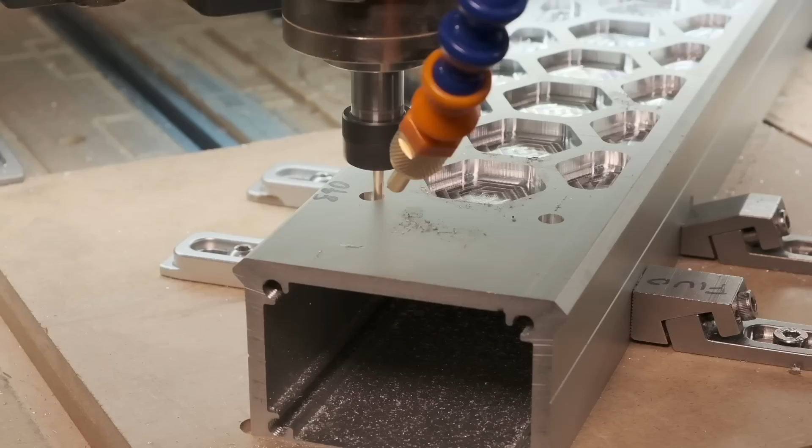In my last CNC video, I worked on the gantry rail for my custom Shapeoko. I needed to machine some features like mounting holes to add hard stops and a homing switch, but really I was just looking for an excuse to give the X-axis a lightweight aerospacey look with an eye-catching hexagon pattern.

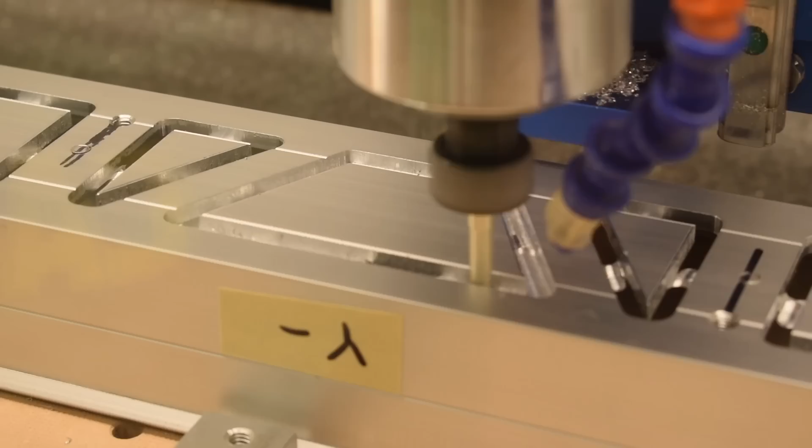In conjunction with the salvaged Y-axis rails of another previously modified Shapeoko, the approximate form factor of my CNC was locked in. The Frankenoko would be an XL-style machine about twice as wide as it was deep, but the foundational structure of the machine was still an open question.

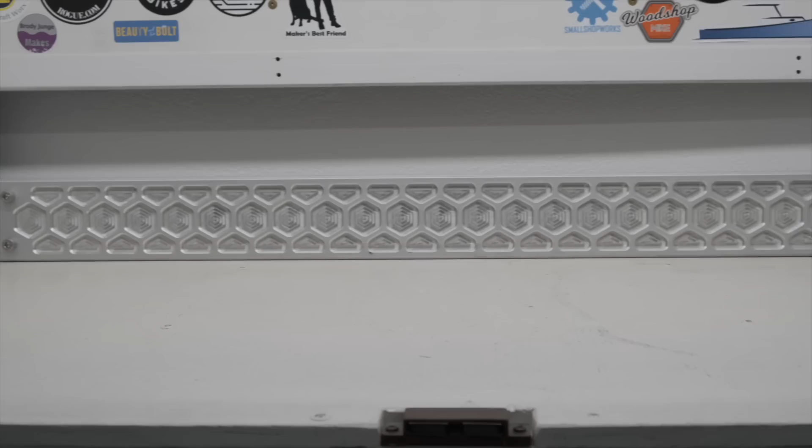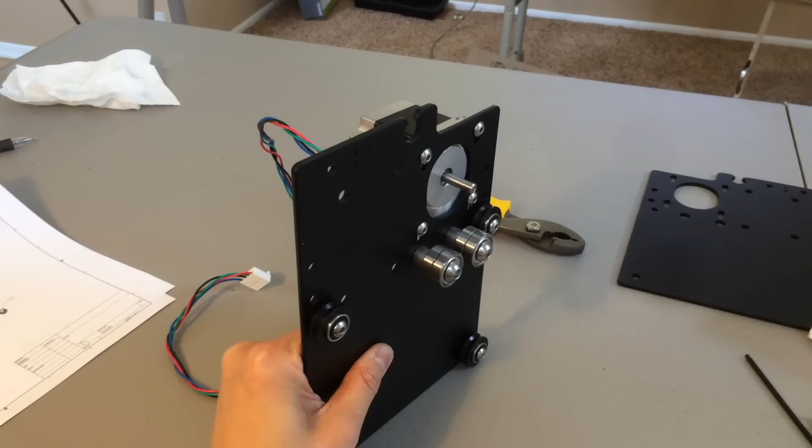I knew for sure I wanted to ditch the sheet metal style frame from the Shapeoko 3. That sheet metal design was innovative for its time because it was easily scalable for production requiring no machining, perfect for a scrappy CNC startup, but it didn't scale well in the dimensional sense. The wider the machine got, the more flex there was in the frame.

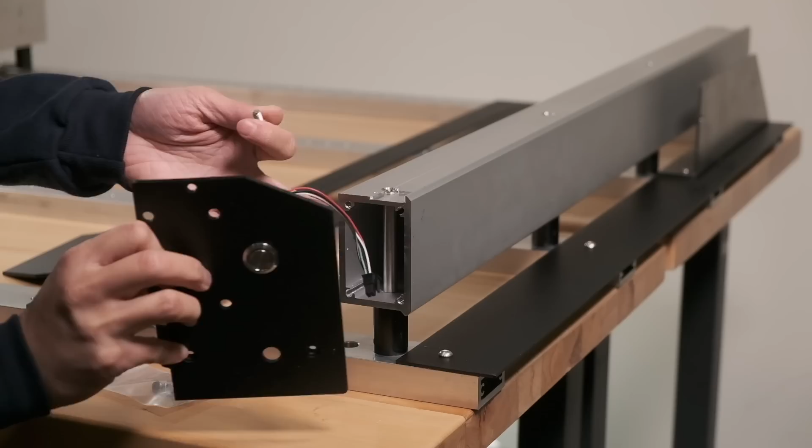When it came time for a new generation of machines, the Shapeoko 4 and Pro had Y-axis rails that were rigidly attached to a series of hybrid table base tubes, and had what were essentially cosmetic plates capping off the Y-axis extrusions. This design was much stronger and resistant to bowing across the width of the machine because these tubes have a closed cross-section and thick walls.

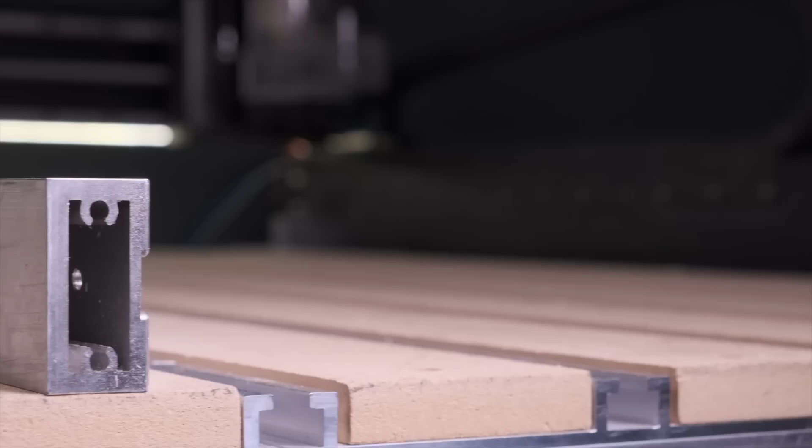Even though they're aluminum, they're still way stronger than the steel straps on the Shapeoko 3. By the way, internally at Carbide 3D, we call these extrusions Nomad tubes, because they were first used on the frames of the Nomad 883. So that's how I'll be referring to this profile from here on out.

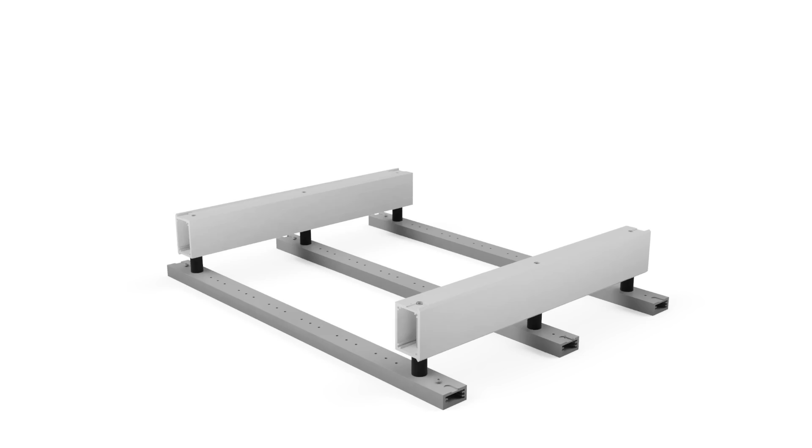This Shapeoko generation was a quantum leap forward in terms of providing a structurally sound foundation for the machine. However, this strength came at a cost. The way the Y-axis rails were attached to the hybrid table required extra standoffs and custom hardware, and it also necessitated accurately machining holes through the Y-axis extrusions, which I didn't want to take on.

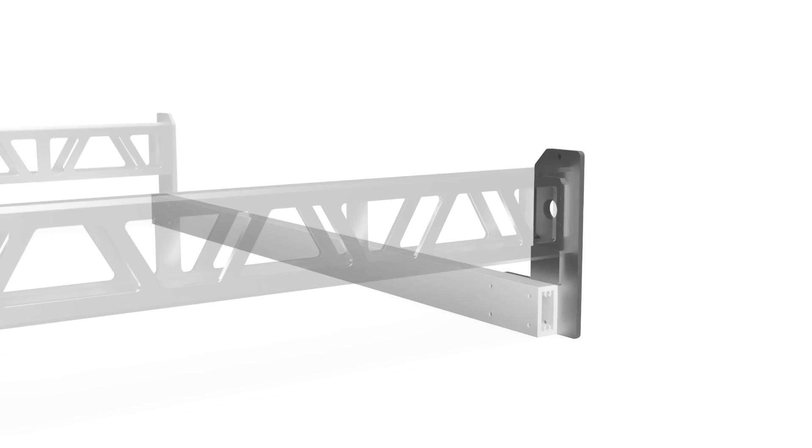So I ended up mashing together elements of both the Shapeoko 3 and 4. I would connect the Y-axis rails to a pair of Nomad tubes by using steel brackets bolted onto the ends of the Shapeoko extrusions. Originally, I had over-engineered these connecting brackets as machined parts with a ledge that would create a repeatable separation between the perpendicular extrusions and ensure that the Y-axis rails were equidistant from the bed.

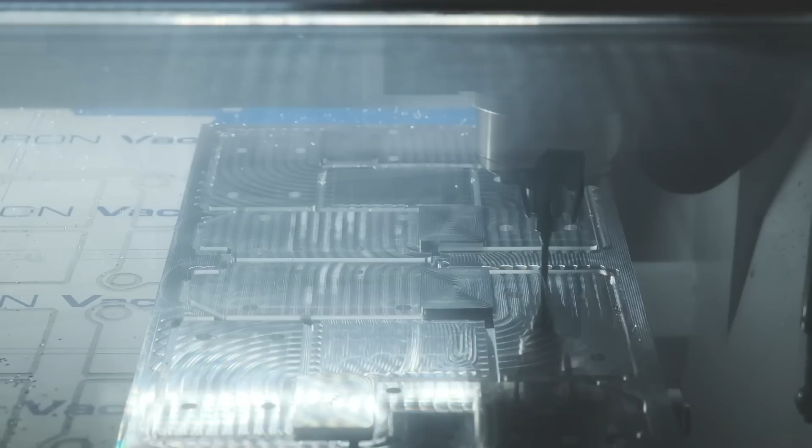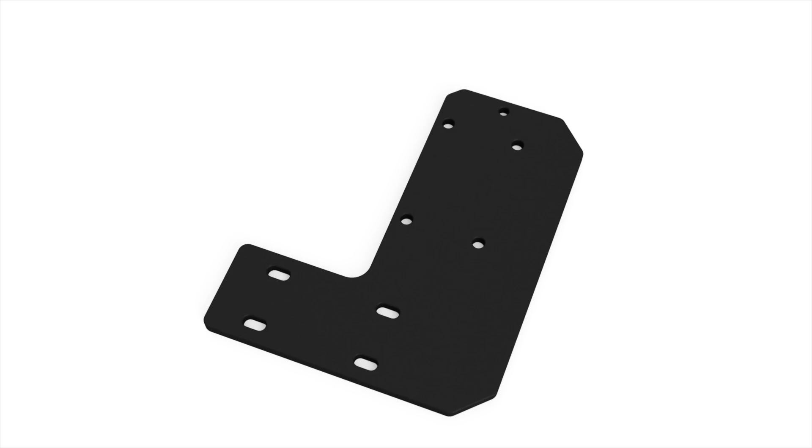But after prototyping a set of these and fighting the aluminum plate stock which wanted to curl and pop off the vacuum table of the Datron as I removed material, I realized this was the wrong approach. Simpler was better. Using laser-cut steel plates would be more in line with the historical ethos of the Shapeoko being an affordable, mass-produced workhorse CNC router.

It would allow the left and right brackets to be identical, and I could outsource these parts easily. To present more surface area to bolt things together, I would rotate the Nomad tube so the taller face was flat against my steel brackets. This would let me fit 2 rows of M6 holes for mounting, and it also put the tubes in a stronger orientation to resist sagging.

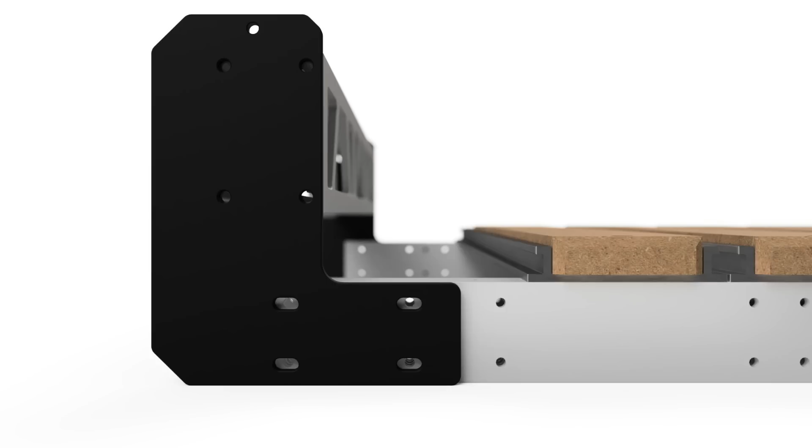Slotting the holes in my steel brackets would afford me some margin for error in assembly since I didn't know how accurately I could machine the M6 holes in my Nomad tubes.

Upon my Frankenoko frame, I had originally planned to implement a hybrid table. I planned to steal some hybrid table extrusions and work them into my base structure. And of course, I also wanted to make some improvements to the Carbide standard implementation.

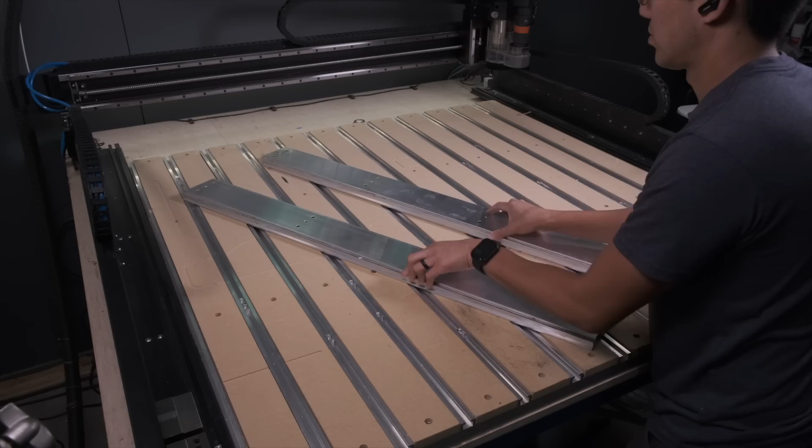I designed custom MDF slats to go with the hybrid table that had a recessed tail, so you could machine level the work area without leaving a raised lip that would prevent you from loading oversized stock. I extended and chamfered the front of the MDF to stop anything like a vacuum hose from getting caught on the aluminum extrusions, and I included multiple mounting holes to attach the MDF directly to the hybrid table extrusions.

This pinned the MDF and the aluminum together, allowing them to act as a stronger composite beam to resist deflection if a heavy load was applied to a single slat. I'm not gonna lie, I was pretty happy with these improvements, and I was excited to make this machine table a reality.

But then I ended up with a salvaged Shapeoko 3 threaded table, and letting this beautiful plate of aluminum end up in the scrapyard was just too painful a prospect. As someone with a mild hoarding problem, I knew I just had to find a way to integrate this into the Frankenoko. After reverse engineering this table in Fusion 360 and bringing it into the Frankenoko project, it appeared to be a pretty good fit for my work area.

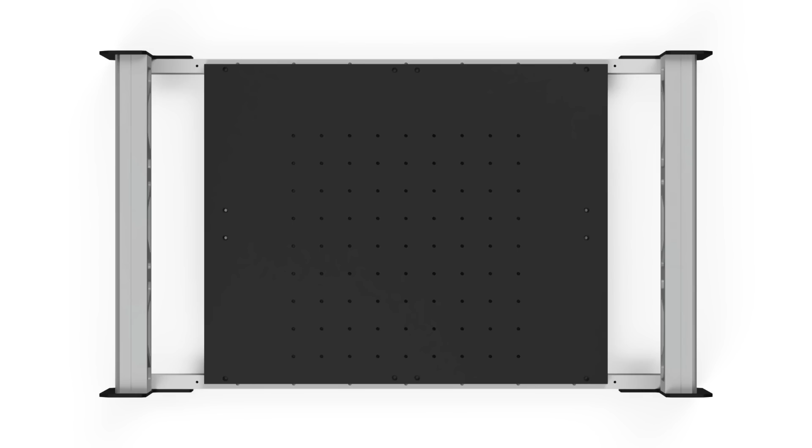The width was almost perfect for the X-axis travel of the machine, but it would still require a lot more work to pull this off. First of all, the threaded table wasn't quite deep enough to completely span the Frankenoko in the Y direction. The original Shapeoko 3 frame attachment points were meant to be on the inboard flanges of the sheet metal straps. This didn't line up well with the relatively narrow real estate I had available on top of the Nomad tubes, so I would need to mill out brand new mounting holes.

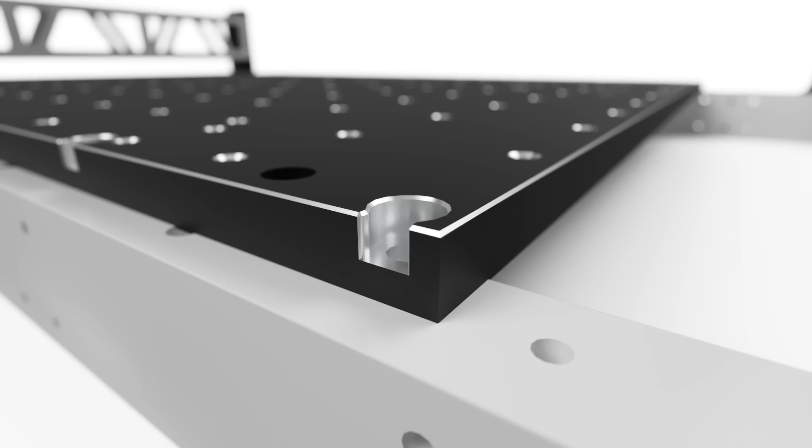The plan was to machine a new set of mounting holes sized for M6 hardware at a regular 100mm interval. Because these would live very close to the edge of the table, I would blow open the counterbores to eliminate any thin-walled sections. And if we're being honest, the original threaded table kind of skimped on holes, so I added a bunch more right up to the edges of the work area.

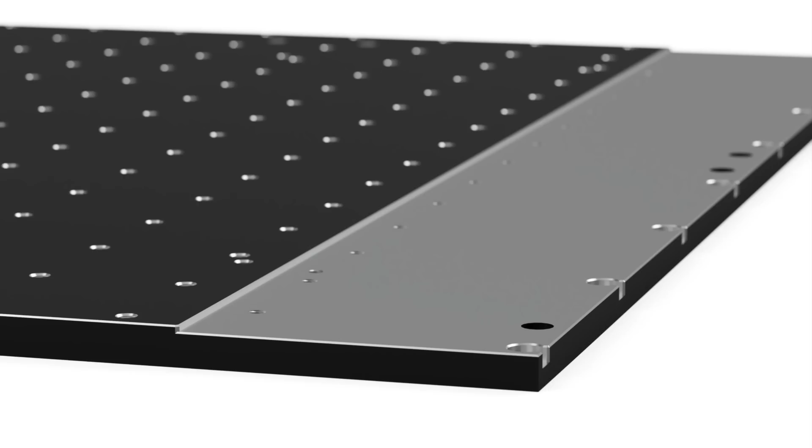Just like my original plan with the custom hybrid table MDF slats, I plan to machine down the unreachable region at the rear of the threaded table. So that was the plan. Now to make it real.

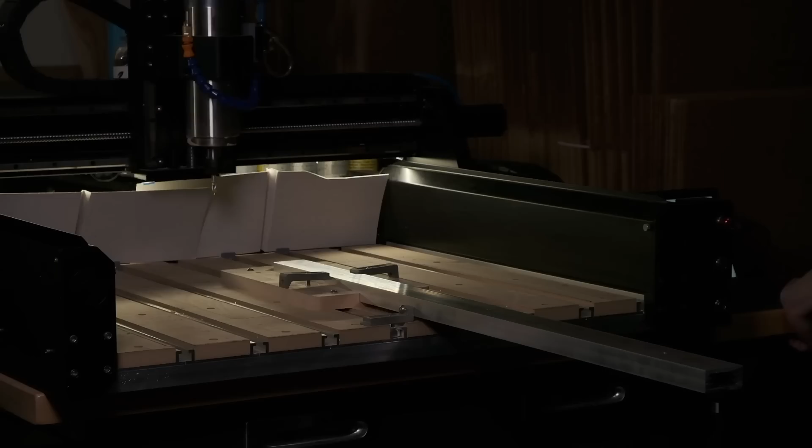I first started with machining the Nomad tubes since the stakes were much lower here. I have several spare Nomad tubes at my disposal from old decommissioned machines, but threaded tables are few and far between. I designed and machined a jig in some MDF that would hold the Nomad tubes. The point of this fixture was to allow me to use the HDM like a big CNC bandsaw, ensuring perpendicular cuts.

While I had the stock clamped down in this setup, I also machined the pre-tap M6 mounting holes. At the time, I didn't think I'd be making a bunch more M6 holes, so I didn't invest the time into working out a good thread milling recipe. These holes would just be tapped by hand.

Disclaimer alert here, this particular bit of machining was done like 2 years ago, before my well-intentioned project plans were waylaid by home ownership. This early iteration of the Nomad tubes allowed me to test fit the Frankenoko with some of my previously machined parts. I learned a couple lessons here which I would use to later improve the design. We'll cover some of those changes in a future Frankenoko video.

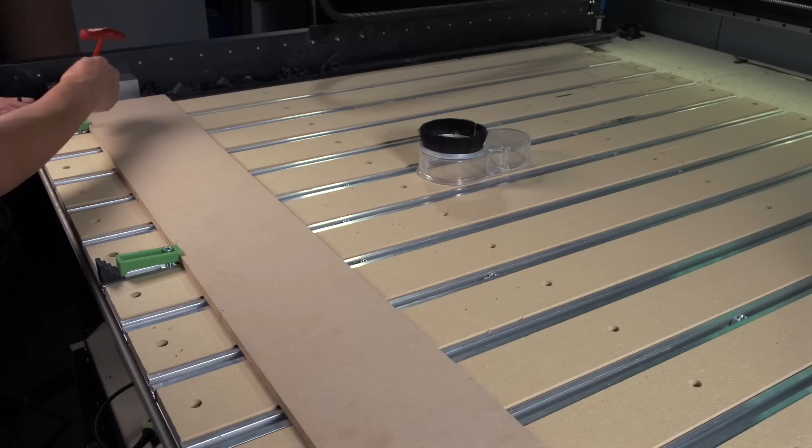Let's fast forward to the present day where it's time to perform Op 2 on the Nomad tubes on the Shapeoko 5 Pro. To ensure my Nomad tubes would be perfectly lined up with the machine axes for this phase, I cut a straight line in some scrap MDF to serve as a fence. Then, referencing that edge, I used some crush-it clamps and stops to hold a Nomad tube upright.

I bored a series of through holes that were meant to be tapped, which went off without a hitch. There are more holes than I technically need here because I'm leaving open the option of reverting back to a hybrid table if that somehow proves advantageous.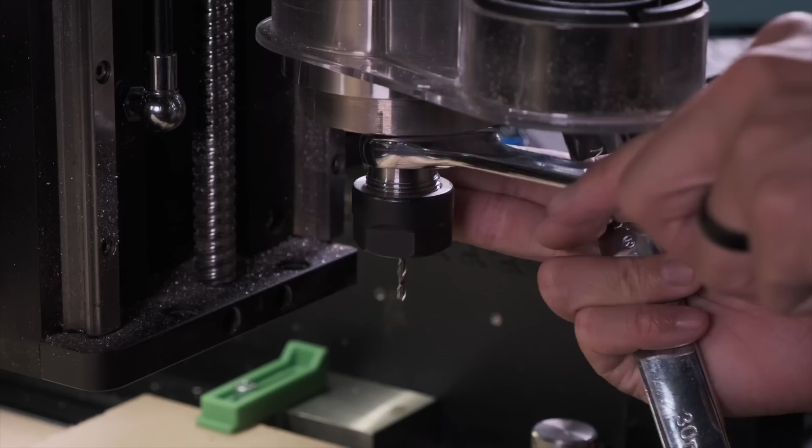Next, I took a stab at thread milling. I'm using a Datron thread mill for this step, or if you prefer the title in the brochure, the more delightfully named, though not technically accurate, thread whirler. Thread whirling generally describes a lathe process that uses an annular cutter to make precise threads quickly. By using multiple teeth positioned around the circumference of the tool, you end up with high productivity while balancing out the cutting forces and deflection, kinda like with pinch turning. But lathes are witchcraft, and we really need to get back to the world of milling.

With my thread whirler loaded in the spindle, I crossed my fingers, hit cycle start, and just watched it. No machinist stance, just hoping for the best. The moment a thread mill plunges into a hole is always the most terrifying. You're never 100% sure if the cutter's dead center on that hole when watching it from a safe distance, so you're half expecting the thread mill to crash into the material and shatter on contact.

And then, once the thread mill does engage the material, there's no going back. You can't pause and retract the cutter until it's finished spiraling its way out of the hole. If something goes wrong, you just have to ride it out. Some people might try to dial their feed rate down to like 10% and hold out hope that they could stop a catastrophe before it happens, and they might be right, but I was just kind of in the mood to YOLO it.

To my relief, first contact with the material went just fine. To take it extra easy on the tool, I opted to do the threading operation in multiple passes. After the program successfully ran its course, I tested the holes and found that my threads were binding, so I tweaked my fusion parameters until I got things to fit just right.

I know there's calculators and spreadsheets out there for this stuff, but sometimes it just feels easier to wing it. Eventually, I had satisfactory threads, perhaps a touch tight, but they would hold strong, which was the important part. I swapped out one Nomad tube for another and repeated this program a second time, and after one more cycle start, these were done.

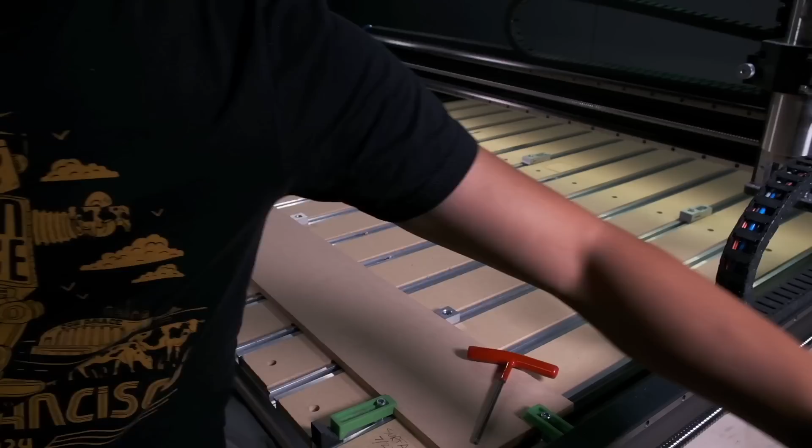Now it was time to tackle the threaded table. With a good thread milling recipe in my back pocket, I felt pretty confident going into this phase of the project, but there was still one aspect about the impending machining operations that I was a bit nervous about.

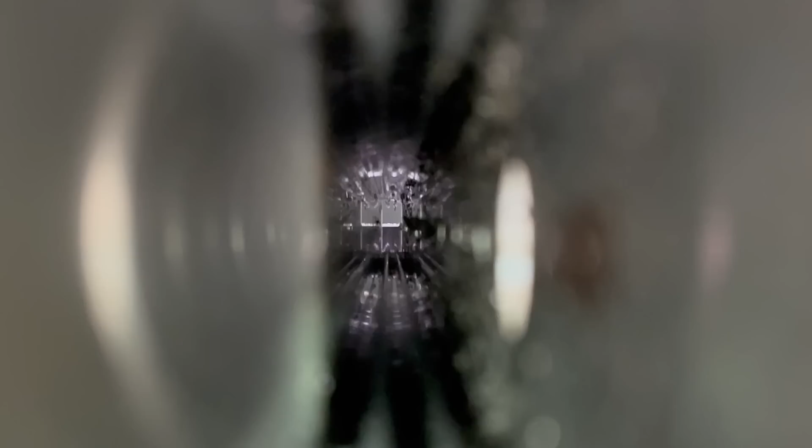Boring holes into the Nomad tubes was the easy part, because after a depth of 5mm, the end mill has already broken through to the inside of the extrusion, and all of the chips will naturally fall through. There's almost no risk of aluminum gumming up the flutes and clogging your cutter.

But this threaded table is 13mm thick, just over half an inch, or 4 times the diameter of the cutter. Chips can easily get stuck in a hole that deep. So to mitigate that risk, it was essential that I use air blast to flush the holes of any chip accumulation.

The first operation was to surface the back half of the threaded table, which I'd rotated 180 degrees for better visibility. This operation was programmed as a contour toolpath with multiple roughing stepovers. That way I could get more consistent toolpath marks versus a pocketing operation, and I didn't need to worry about how well a facing toolpath would stay within an arbitrary region.

The next sequence of operations established the counterbore areas where my table would be mounted to the frame. I increased the lead-in parameters here to guarantee that my end mill would be plunging down and starting the cut from outside of the stock.

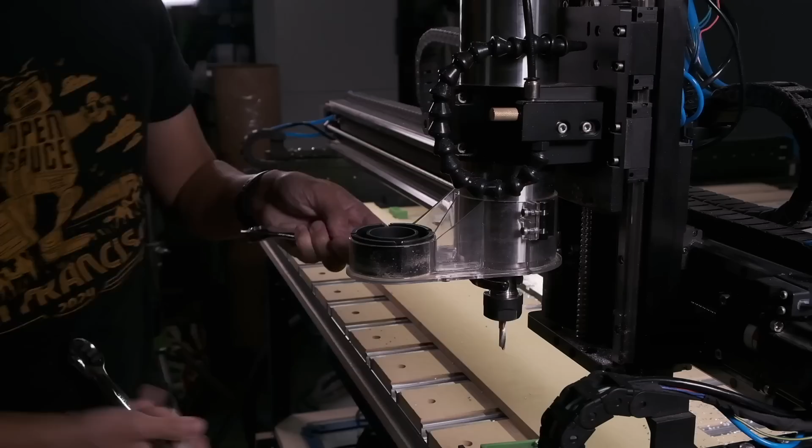Now it was time to swap in the 1/8 inch end mill to make the through holes. I took my time to make sure the air blast nozzle was centered on the end mill, aimed about 1/4 inch up the flutes. I don't really need the compressed air when the end mill first makes contact with the aluminum. I need it the most after the end mill is deeper in the material.

The initial results were good. All of the holes were successfully milled to a partial depth, then the Shapeoko came around to finish the job.

The interpolated boring I'm doing here is split into 2 phases. That gives the end mill a chance to retract halfway down, allowing the compressed air extra time and space to really evacuate the chips and minimize the risk of clogging the end mill in these deep holes.

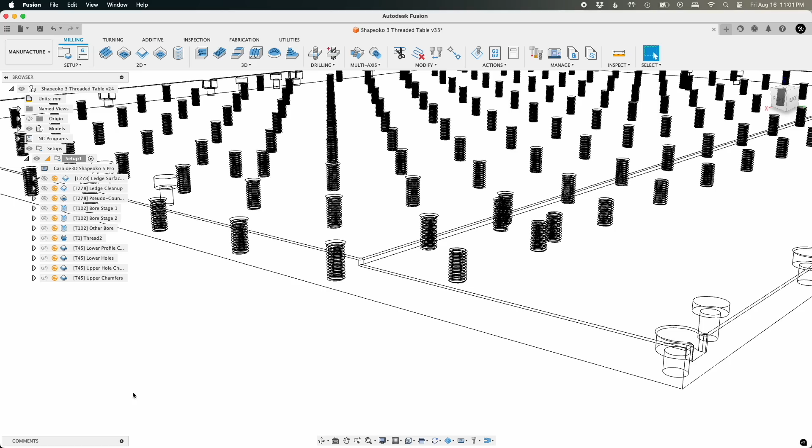These last boring operations were meant to cut through the aluminum and about 1 millimeter into the MDF. This was necessary to create the clearance for the thread mill to start as close to the bottom of the holes as possible. I didn't want to mill too deeply into the MDF though because I hate marking it up, and if the thread mill doesn't cut a full thread starting right at the bottom surface, it wouldn't be a problem because I planned on chamfering these holes manually later.

But I was getting ahead of myself. Nothing mattered if any of these 77 individual thread milling operations failed. This phase was a bit nerve-wracking, but there was literally nothing I could do.

I didn't want to chase the end mill with a vacuum hose in case I got too close to the spindle. I already had the air blast pointed at the holes and the pressure cranked up. All I could do was watch and listen for the sounds of anything going wrong. But nothing went wrong. This process went super smoothly and the thread mill lived to whirl another day.

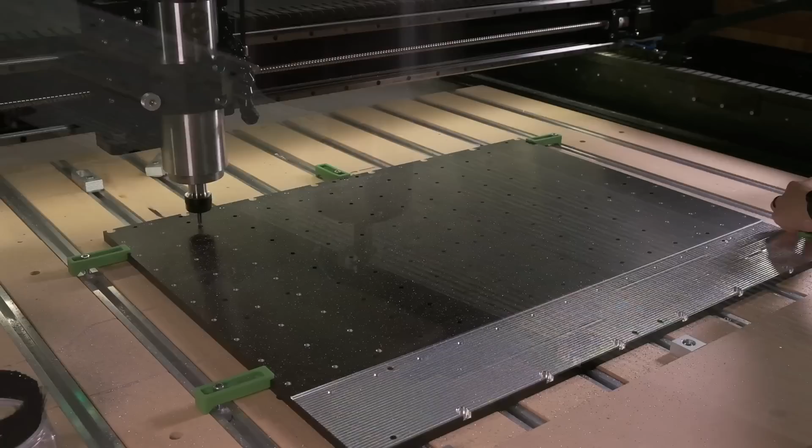And, of course, the most important part of any good project is the gratuitous application of chamfers. You'll notice some of the chamfers aren't as deep as others. I think that's because I was playing musical chairs with clamps to allow the Shapeoko to hit every side of the table, and the uneven clamping pressure created some tilting, but functionally it's not that big a deal. Other than that small cosmetic defect, I'd call this job a complete success.

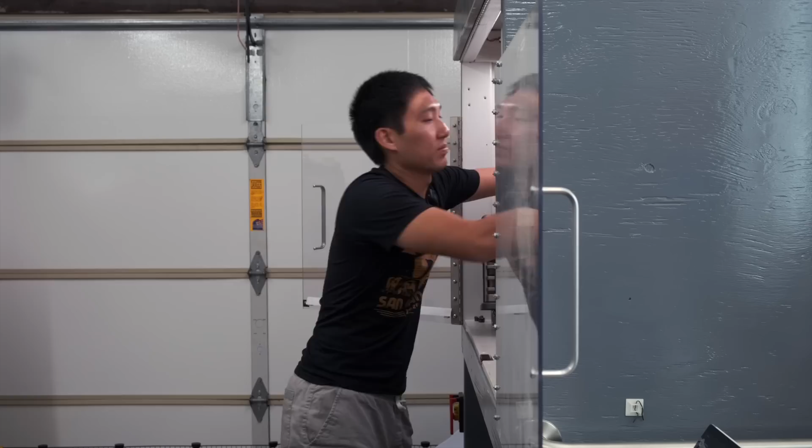When I got home, the first thing I did was clear out my CNC enclosure, which had been unceremoniously used as storage while I was waiting for my evil CNC plans to mature. Then I started laying out the parts to put together, and in addition to my extrusions, this frame would not be possible without the Y-axis end plates.

These parts were made for me by my friends over at Fabworks, who specialize in on-demand laser cutting and metal finishing services at competitive prices. These guys have helped me out in the past and I've always been satisfied with the quality of their work.

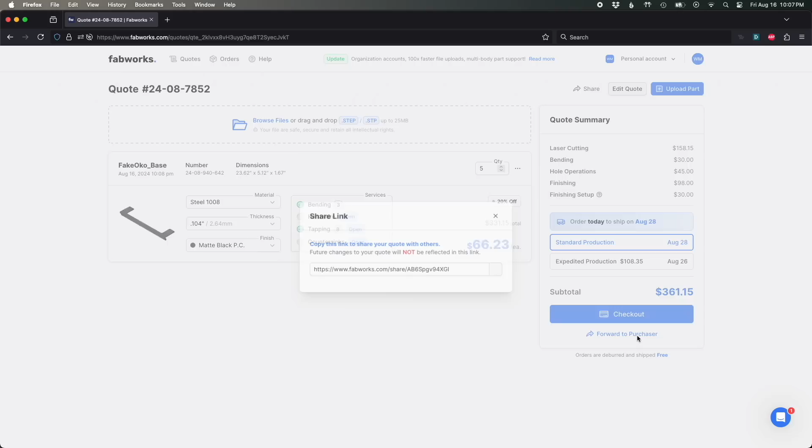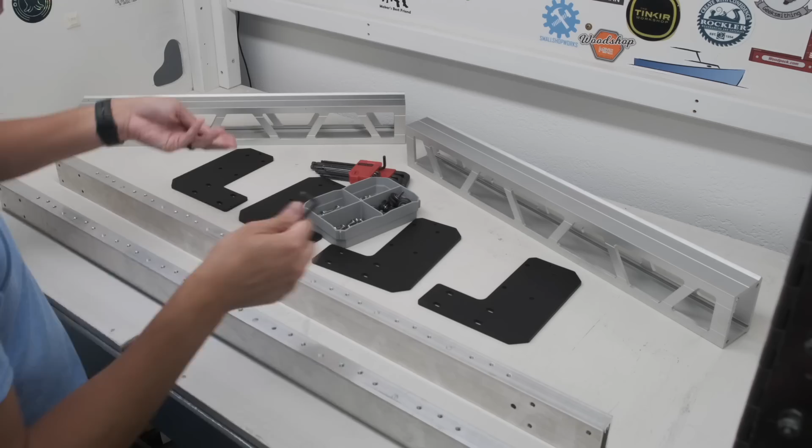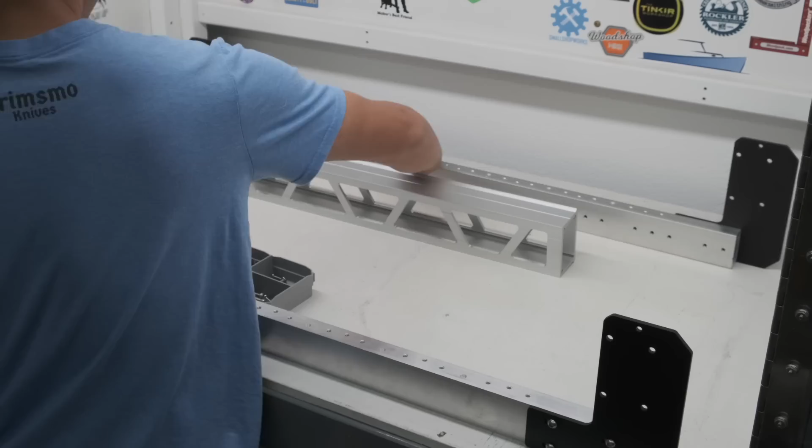Now back to the assembly. The first thing I did was attach my Y-axis end plates to the Nomad tubes. I attached the screws loosely so I wouldn't mar the powder coating. These assembled parts would stand up by themselves, so I was able to get them positioned pretty close to where I needed them, then carefully lowered in the Y-axis extrusions and pinned them with 2 screws apiece, again trying very hard not to damage the powder coating until I'm ready for final assembly.

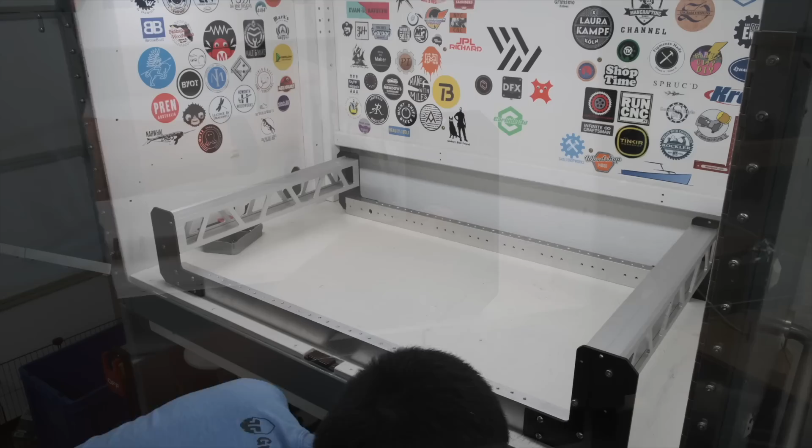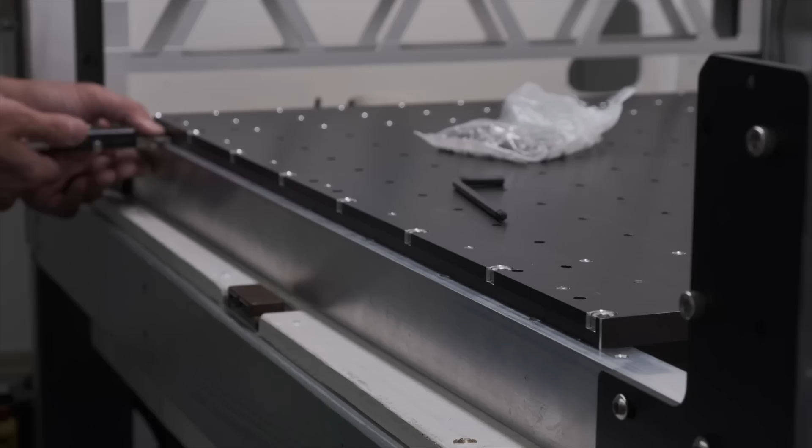Now, with the frame holding its own shape, I could drop my threaded table gingerly on top and put screws in each of the counterbore holes, tightening them to within a quarter turn of snug, backing them off where necessary. Using calipers, I bumped and tweaked the relative position of the table and the front Nomad tube so the two were parallel to within 0.02 millimeters over the width of the threaded table. I'm not German, so I'll call that good enough.

I tightened the screws along the front and confirmed the alignment was still good. Then I lightly tightened the rest of the screws on the Y-axis end plates to take out the rest of the slop in the frame. This would draw the rear Nomad tube parallel to the front tube within the tolerance of the cut ends of the Y-axis extrusions, and then I could tighten down the mounting screws at the rear of the threaded table. Then, stepping back, I could admire the magnificence of this frame.

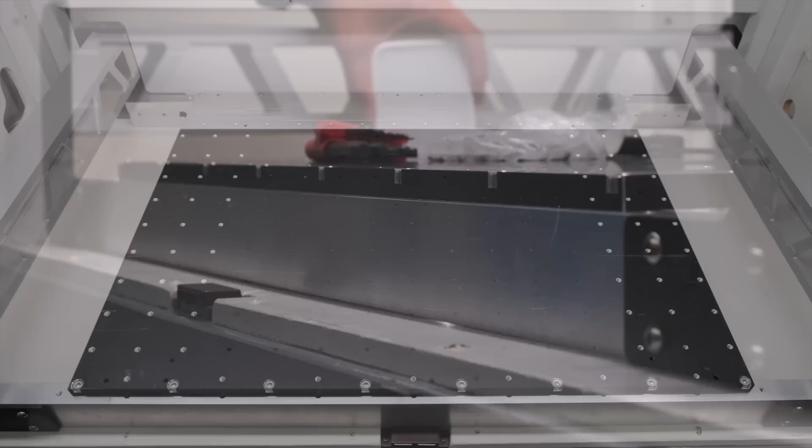The Nomad tubes rotated 90 degrees combined with a slab of aluminum absolutely do not care about any bow you have in your table or enclosure floor. They will not sag ever, at least not to any appreciable degree with any reasonable load you'd put on this machine. Short of bringing in a 100 or so kilogram slab of granite to build a machine on, this is the most solid foundation a desktop CNC router could have.

And my favorite part is it sings the song of its people, Big Stupid Aluminum. Oddly satisfying. Yeah, I know this technically means my table is resonating at some microscopic level, and I'll lose a couple microns of accuracy, but I'm not German, I'm not Swiss, this is more than good enough.

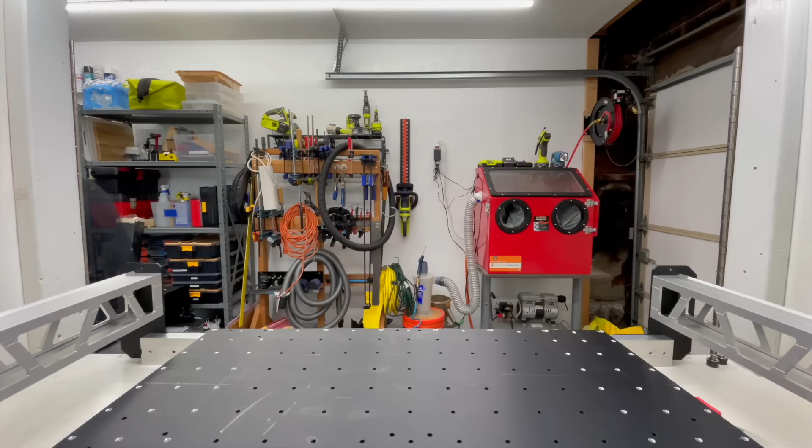Overall, I'm really happy with how this part of the build turned out, and I'm excited to start the next phase, which is getting this gantry rail mounted on this frame.